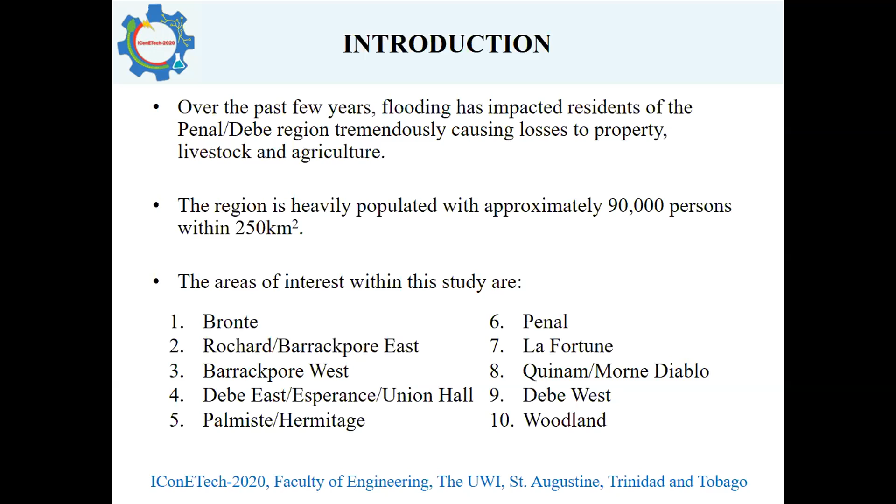And the sub-areas within Penal Debe are listed there. So some of the more heavily affected areas would be Barrackpore, both Barrackpore East and West. Then we'd have Penal, Woodland, and Debe. So let's look at what the objectives really were of this initial study.

So we try to understand how the flooding that has taken place within the area has affected residents primarily. And we try to get some basic or preliminary information on the dollar figure that translates to, and did some analysis of the current infrastructure that exists. And some recommendations would have been made as to how we should probably go forward in developing solutions.

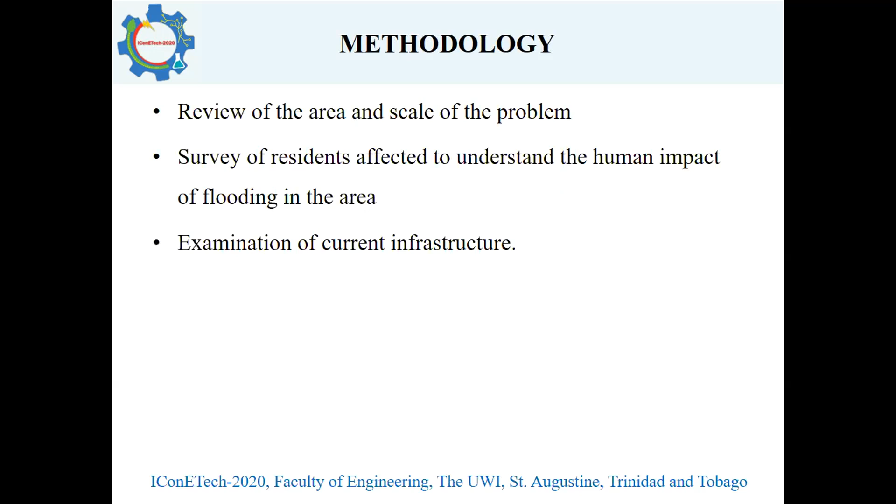So first of all, we looked at the area to identify the scale of the problem. We conducted surveys with residents to really understand the human impact of this flooding and what the residents really had to go through. We looked at some of the current infrastructure in the region, and we proposed some solutions for alleviation. Right?

So I like to put this work into perspective though, in that this was just the initial phase, and we are currently progressing with further development of models of flooding in the area and the implementation of instrumentation and whatnot to try and guide understanding of the flooding that has taken place.

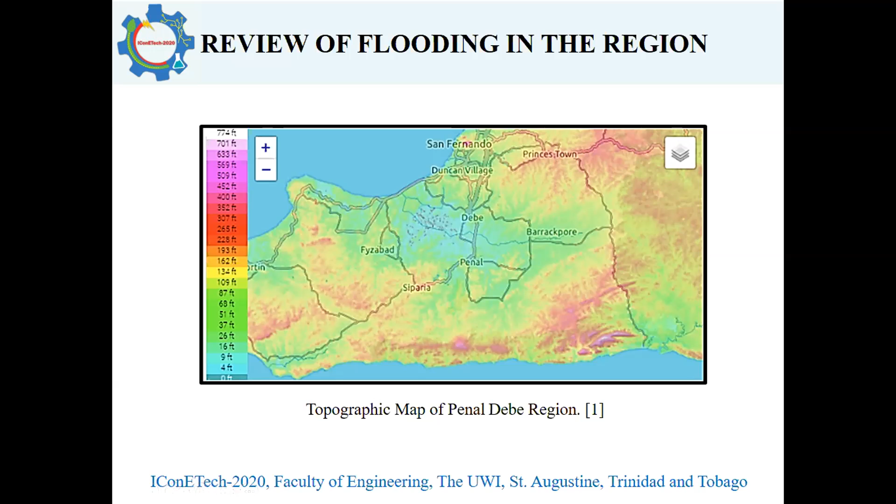So looking at the area itself, we can see that the Penal Debe area, or the entire region really, a large portion of it, is under 4 feet above sea level. So it's actually located within the South Oropouche watershed, right? And it's an area that is generally very highly susceptible to flooding. So it's no surprise, therefore, that with prolonged or heavy rainfall, you do have flooding taking place.

But over the last 3 years in particular, the flooding has gotten to the point where residents have become adversely affected such that they have been stranded, they are unable to exit their homes in some cases, and there has been mass loss of items in their household and damage to their property.

So some of the other factors that have contributed to this increase in flooding are unplanned or illegal development. So just in the last week, actually, you may have seen in the news 2 developments that are taking place on riverbanks or encroaching into rivers. And there is contention with the Ministry of Works and the corporation as to the legality of these things.

And what tends to take place is that the developer often goes ahead and fills the river up or encroaches onto watercourses, knowing that there would be little legal repercussions, or by the time it takes place, it would have already done the works and it would be of no consequence to them.

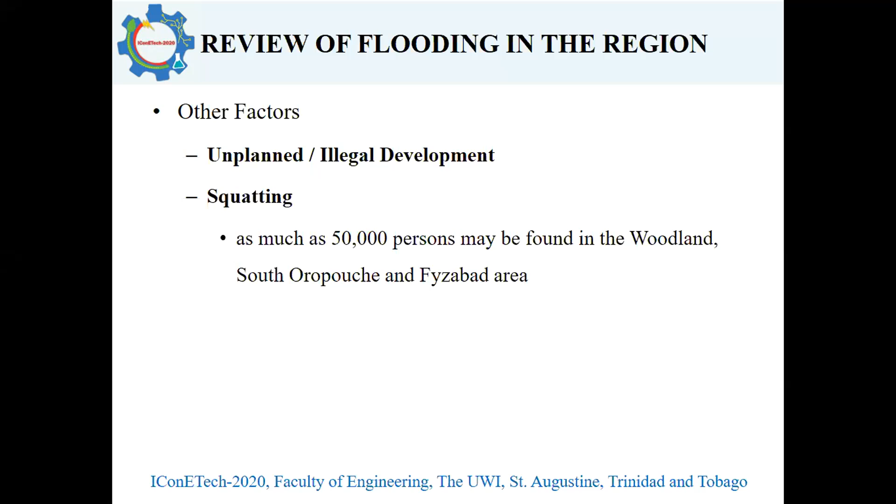We also have a lot of squatting in the area. So just in the Woodland area alone, there was estimated to be approximately 50,000 persons, right? Woodland, South Oropouche, and Fyzabad, squatting in various parts. So these would be unplanned developments and general drainage. So little things like roadside drains may not have been developed to help with the additional water runoff that would come from roofs or paved areas from these houses.

So to look at the incidents of flooding that would have taken place. So this chart, while it might not be too clear, has been derived from the newspaper reports and articles that would have existed every time there was an incident of flooding within the area. So you can see that the first serious or extreme case of flooding occurred in 2017, and it kind of coincided with Tropical Storm Bret.

And after that, later on in that year, there was another smaller case of flooding. So initially, this was played off as due to the tropical storm providing a lot of rainfall for a short period of time, and that caused the water table to become saturated. But then the subsequent year, there was also flooding, right? This was in November 2018. There was another case of extreme flooding. And then last year again.

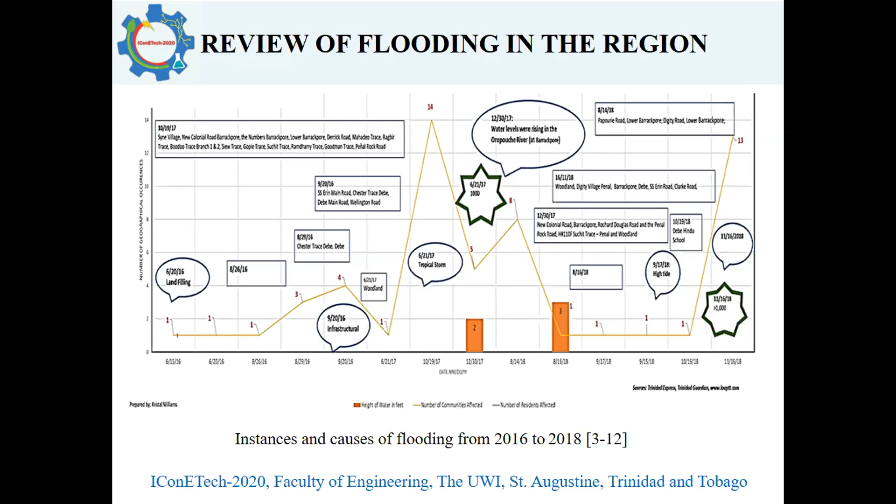So it seems that this is now an annual problem, and that residents throughout the region are taking steps now to try and mitigate against losses on their properties, because they have come to expect it almost. So in looking at the human impact, we conducted a survey with 332 residents, and we gauged a few points.

So the first thing that we looked at was their perception of the severity of the flooding. So we can see that the majority of people that we interviewed either gauged the flooding as very severe or critically severe. So these would be in terms of criteria such as damage to property, isolation, being unable to exit their homes, things like that. So it would be along that scale that they had gauged the impact to themselves.

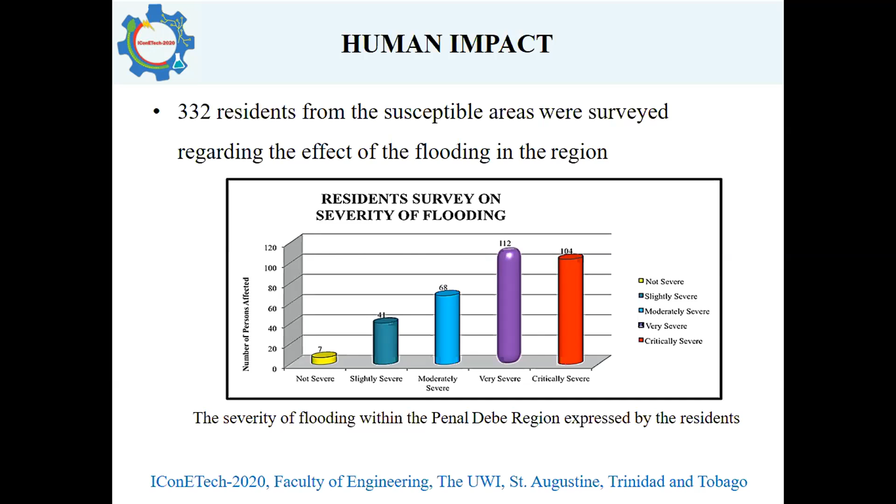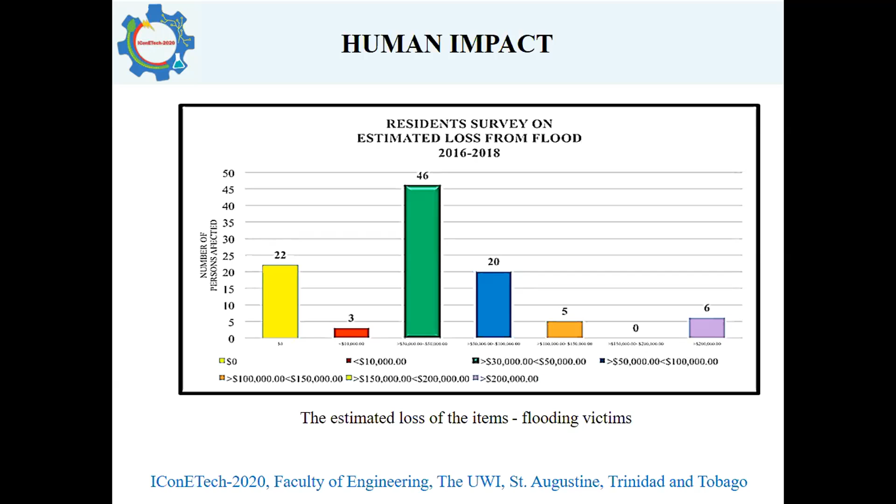In terms of a dollar figure, a large portion of the respondents identified losses between $30,000 and $50,000. And we even had a few gauging more than $200,000 in losses. So the types of losses were to crops, livestock, household appliances, infrastructural damage to properties, losses to vehicles, all of these types of things. And here's a breakdown in terms of the type of items lost, right?

And we also asked the residents what they perceive to be the predominant causes of this type of flooding. So a lot of them identified from their observation poor drainage, lack of maintenance of the watercourses that would be existing already, lack of infrastructure. So this would be things like drains, concrete structures to deal with the flooding, floodgates, all of these types of things. And of course, illegal building.

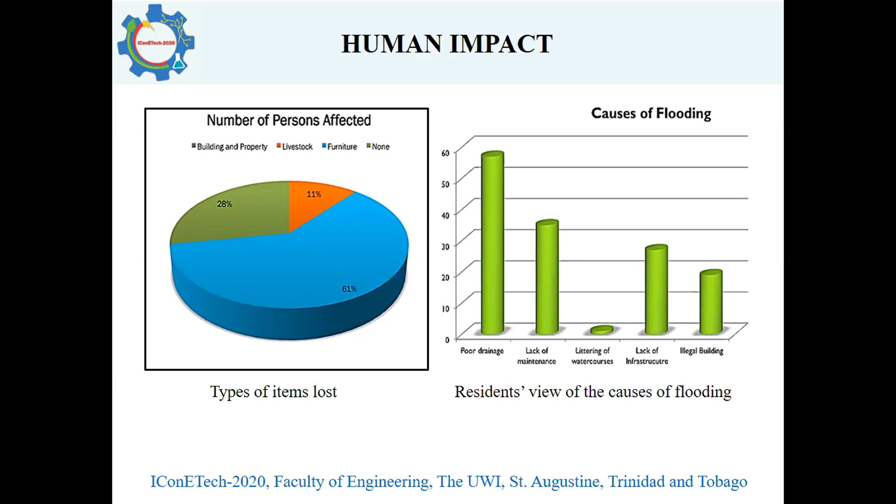So having understood what damage is being done to the residents in the area and the impact that it had, we took it upon ourselves to do a survey of the area itself, the region, and look at what state the infrastructure was in. So when we looked at the drainage, in terms of the roadside drains, a lot of them were severely undersized. They were over 50 years old and in some cases less than 6 inches deep.

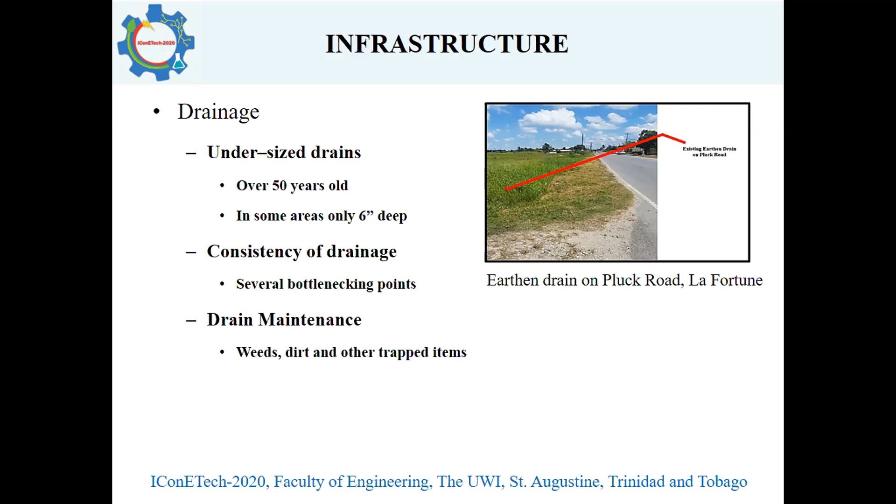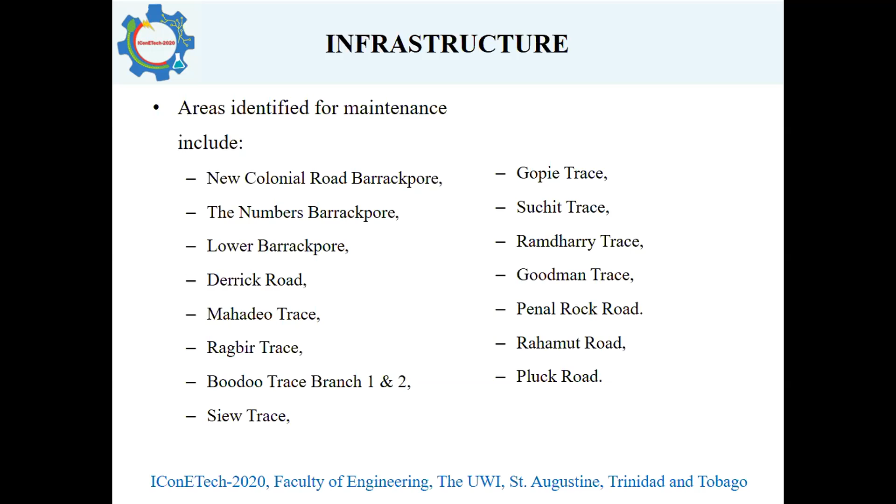Looking at the rivers themselves, so the rivers. Can you run down? Yeah, please.

The rivers themselves are the major watercourses, and some of the recommendations that we had there were looking at channelization, which was dredging and widening and deepening of the river, development of meanders. So these meanders would help to slow the water flow through the river to try and prevent that rapid rise in water flow. Retaining walls in certain portions of the river would assist in maintaining the river banks, and it would help in directing the floodwaters.

Gabions and Reno mattresses are preferred because they would allow the banks to be stabilized without having concretization taking place and have vegetation coming in as well. There has always been a call for retention ponds and dams in the area to help with water scarcity and also to create capacitance to store this large volume of water. And of course, vegetation of the wetlands. Climate change has always been a problem in the area, and education of residents in terms of the impact of illegal development and littering would play a part as well.

Flooding hardware, so there are very few active floodgates in the area. Although there are 9, only 2 of them are working, and there has also been identified the potential of a parallel river delta to help with runoff when there are cases of high rainfall.

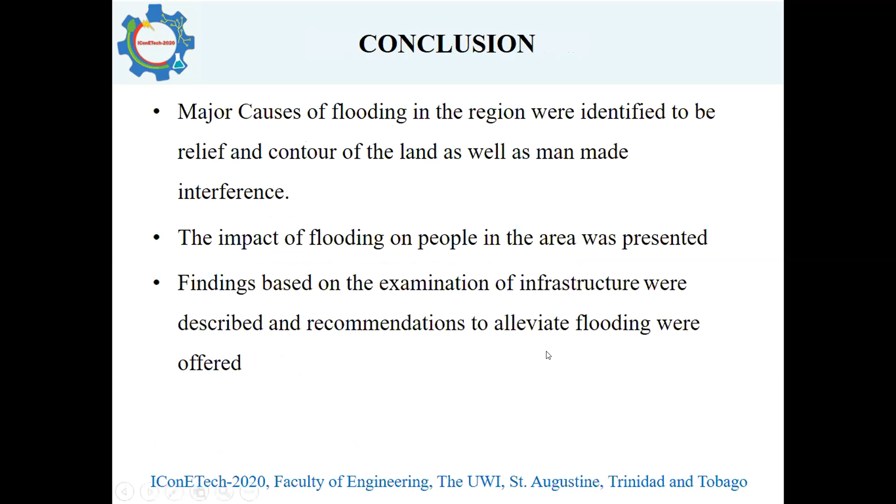So in conclusion, we looked at the major causes of flooding in the region and the impact that it would have had on the people in the area, and presented some preliminary findings and made some recommendations to alleviate the flooding. So that's the end of the presentation. Here are some references, and I'll invite any questions.